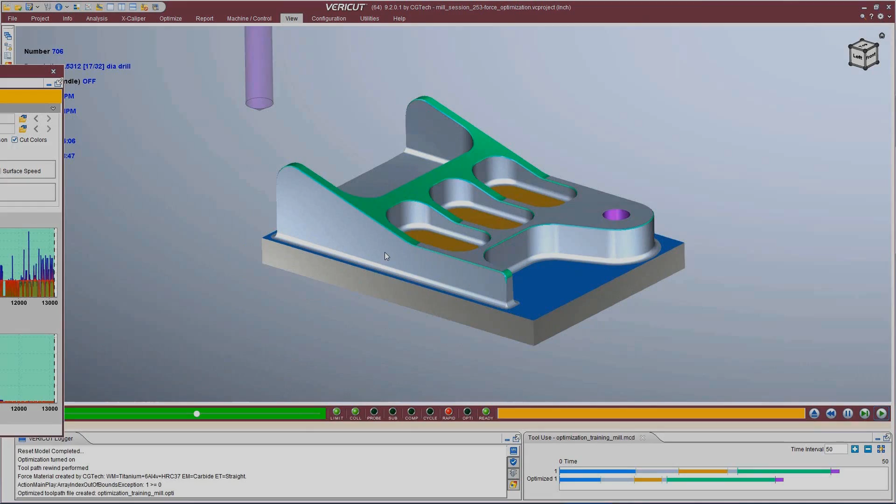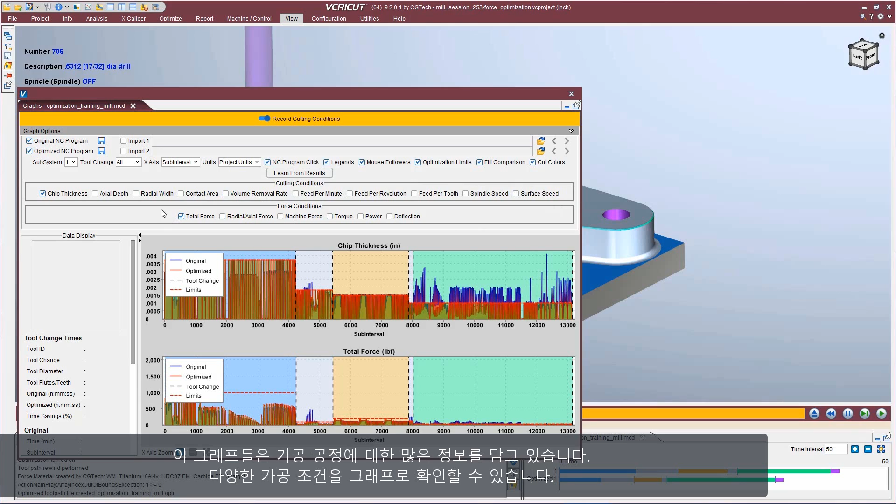These graphs contain a wealth of information about the machining process. You can see there's tons of data metrics that we can take a look at in graph form. I'm just going to use chip thickness and total force and give you some ideas how these graphs work for you and information that they can show.

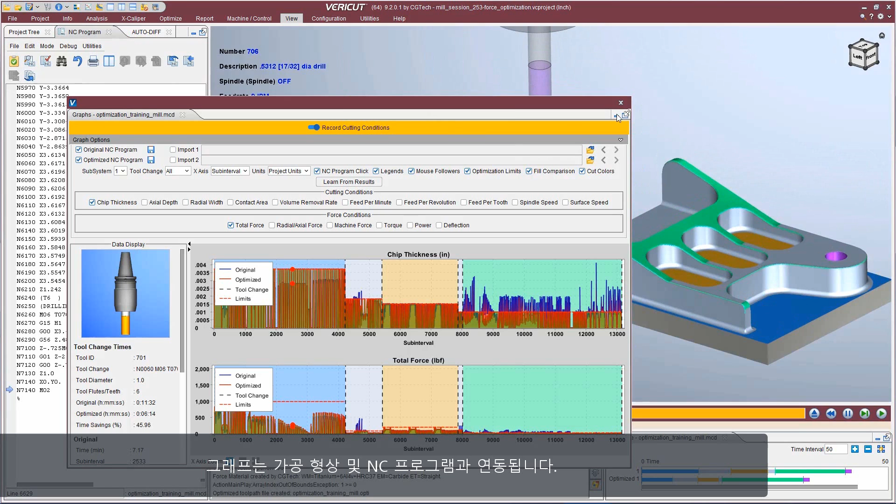The graphs are interactive with the part and also with the NC program. So for that, we'll use the docked view of the NC program, and we'll put the part over here just where we can keep an eye on it. For starters, let's take a look at the first tool. Now I've got a couple of different graph lines going on here and some colors, so let me show them to you one at a time.

This is the original NC program graphing that we can see for this first cutter, and the cut color that you see in the background ties to the color on the part to give you a clue of which machining operation or toolpath you're examining. Now looking at the graph activity, we see that it looks relatively constant, but you've got this red dashed line up here, which is the target chip thickness for this operation and this tool.

So what the graph tells me here is that we're beneath that line by a significant amount, which tells me that the tool has not been programmed efficiently. There is one lonely spike right here, which kind of puts us in and around where that tool could perform, but the rest of it is performing to a substandard level, inefficient. We would like our optimization to fix that.

So if we look at the optimized NC program, it looks quite a bit different. You'll notice there are no inefficiencies. All of the cutting engaged with material is occurring right at the ideal chip thickness for that tool. Now look at the cutting forces. They're still below the ideal cutting force of what this tool can withstand. So there are no problems with cutting force.

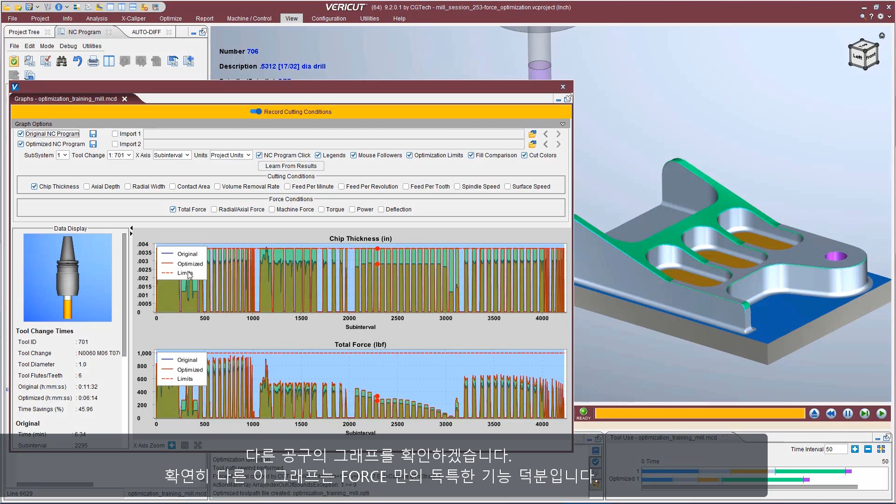Let's look at another tool. This particular tool demonstrates something else that Force is unique about handling for you, and that's making corrections to the NC program when things are looking too aggressive. Anything above the red line, like all of these spikes in this area here, are excessive tool forces or excessive chip thickness, which caused these tool forces. Let's take a closer look.

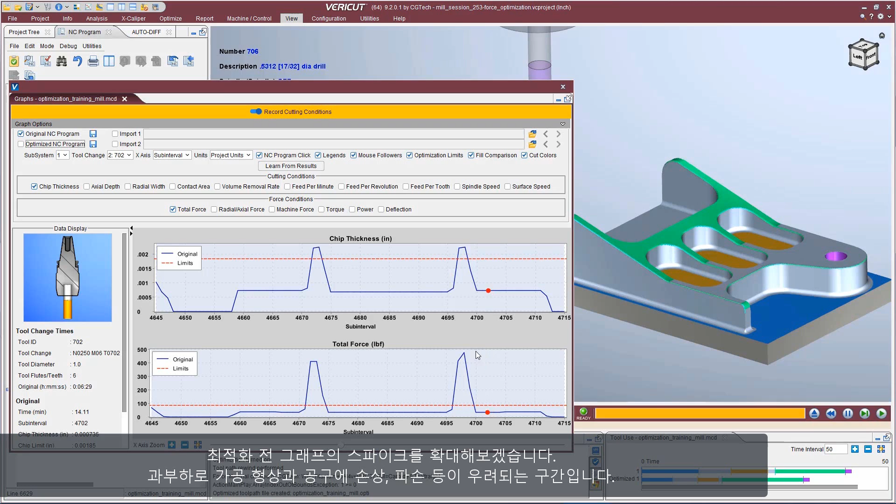Again, the original NC program shows these force spikes, and you'll notice out on a real part on the shop floor there'll be chatter marks. This could be where a tool had trouble and an operator had to dial the machine back with his override, or maybe even the tool got damaged with broken teeth or snapped off. These are all things that can happen with too much tool force.

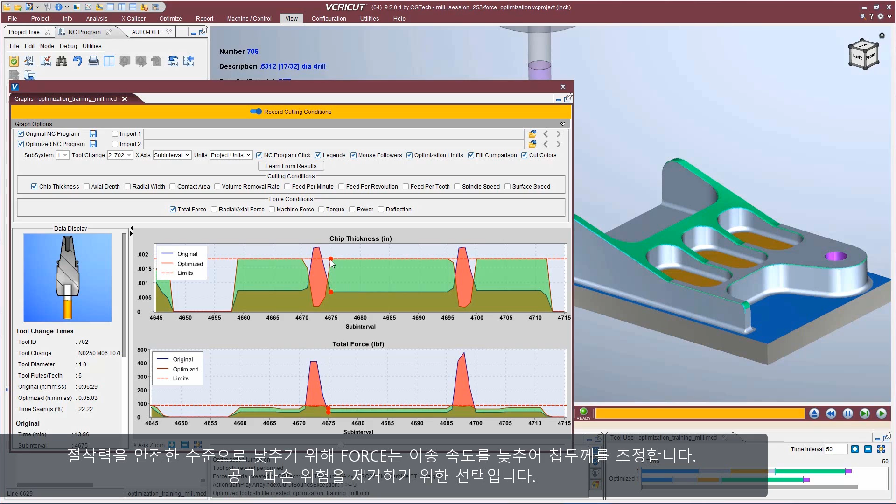In those areas, in order to keep the forces in check, what Force optimization had to do was reduce the chip thickness below what the ideal amount should have been. But it had to do so in order to save the tool. This is the saving measure that VERICUT Force is unique in having to preserve the best tool life and give the tool spindle a break and not have any problems. So it keeps a constant running tool force in those areas, and you can actually hear that on the machine. So this actually is what improves your tool life.

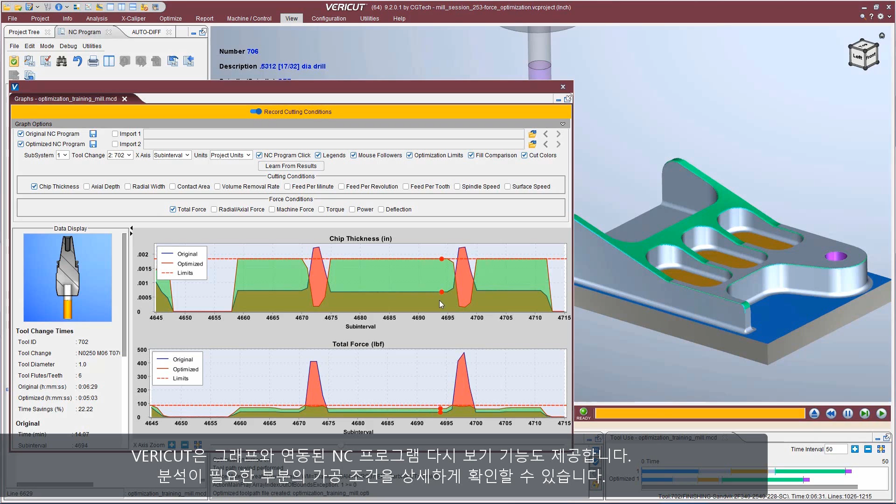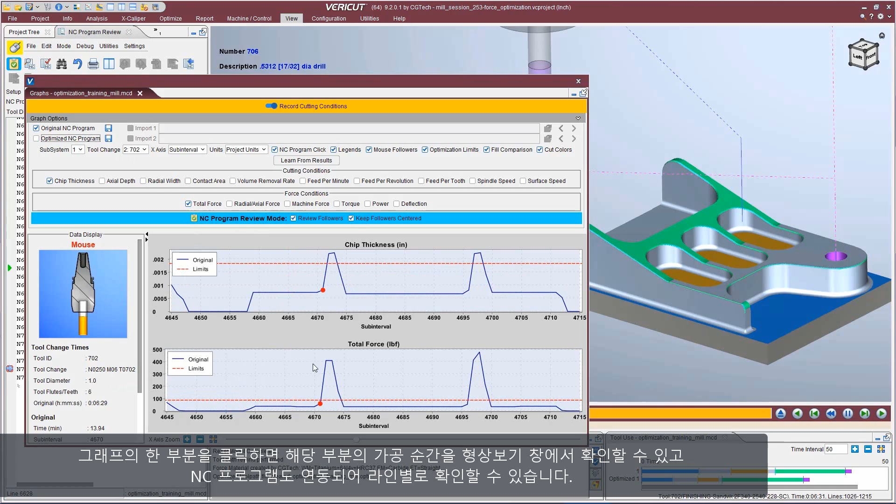There's one more thing I want to show you about the graphs while we're here. VERICUT has an NC program review mode, which is linked to the graphs that allow you to go back and review any of these conditions that you are concerned about. So let's go back and look at the original NC program once again. And this time I will click in the graphs in order to have VERICUT put the material back to the state that it was in right at that time it was processing that motion.

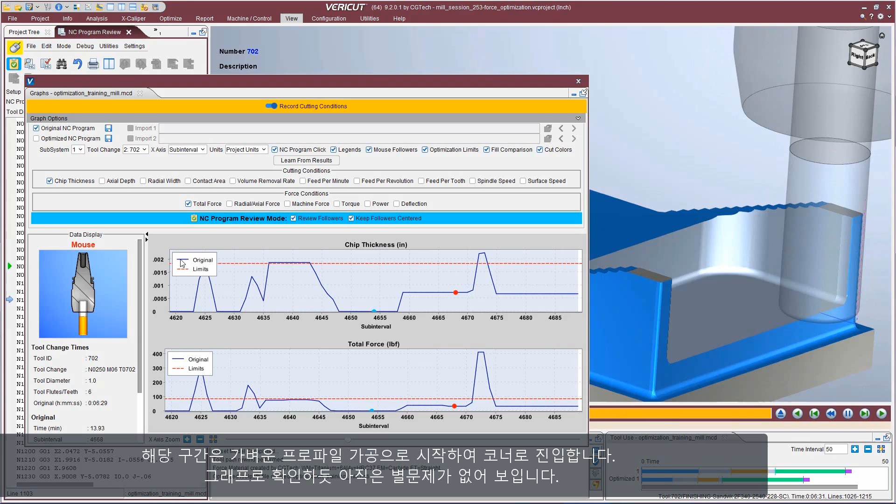So here's the cut, and I can use my thumb roller here to go backwards and forwards in the graphs. So as the cut began, you can see it's right on the profile of the wall, a relatively light cut, and going forward, it gets into the corner. Still looks pretty good. You can see where the cursor is on the graphs here, the blue cursor.

One more time. And then right here where it hits the wall at a 90-degree angle, it opens up a cut around the face of the cutter, which is where all of the chip thickness was increased, and so were the cutting forces. And that's usually going to present itself as chatter marks in the corner. Some programs have a slow down feed rate for corners. This one obviously didn't. So what did Force do with that?

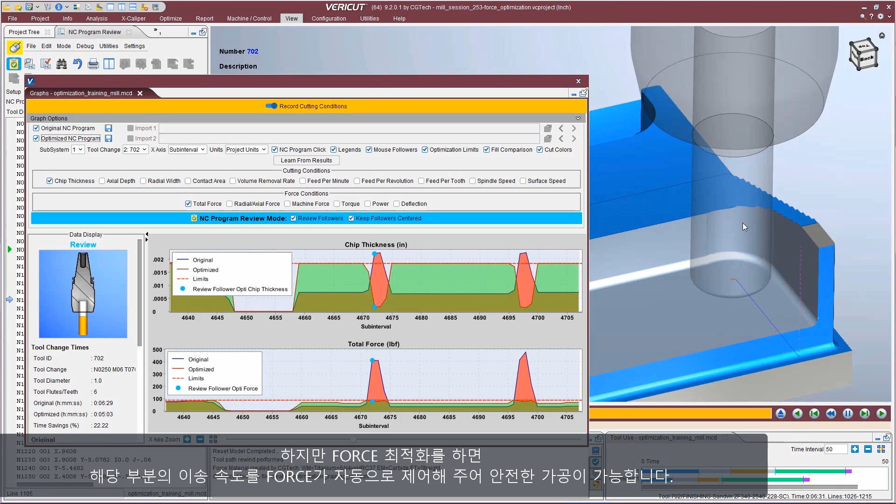That's where it had to reduce the feed rate. So it gives you automatic corner slowdown to make sure your corners come out nice and dimensionally correct. And then it will take off and go into the next corner and do the same thing again. So a very nice way of using VERICUT to be able to go in and analyze the tool motion and investigate problems to learn what's causing them.